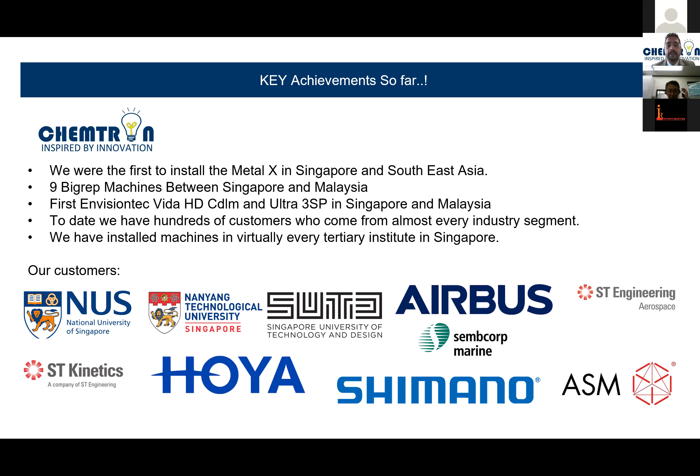system in Malaysia. We have hundreds of customers from different industry segments all across Singapore, Malaysia, Indonesia, Bangladesh, Cambodia. And we've installed these machines in virtually every single education and tertiary institute. So below are some of my famous customers that I work very closely with who have my systems and are using them currently for their production and organization use.

So a little bit about me. When I started out this business, I had zero clue about 3D printing. I never knew what 3D printing was. I had no idea what it was all about. In fact, my background was an auditor.

I was an accountant. I actually worked for Ernst & Young for 3 years, and I was doing auditing for companies. After my time there, I was looking for something different, and I like to talk, I like to present, and I joined the family business. And that's where I was given the task of expanding this up and coming technology called additive manufacturing in my country. So I started out from zero.

And the reason why I keep mentioning this is because I want to tell customers and potential people over here that it's not a very difficult technology. For me, I have zero manufacturing background. I have no degree in engineering, but yet I still am able to learn and understand this technology easily, which is, if I can do it, you guys can do it for sure.

Now, for us in my company, what I do is I very carefully pick brands that I believe will give a lot of potential, a lot of benefit to my customers. So whatever brands that I'm talking about are brands that I've studied properly and have a very strong impact in the market. It's not any kind of 3D printers. There are thousands of 3D printers in the market today, but the ones that I pick are the ones that I feel will give benefit to the people who have it.

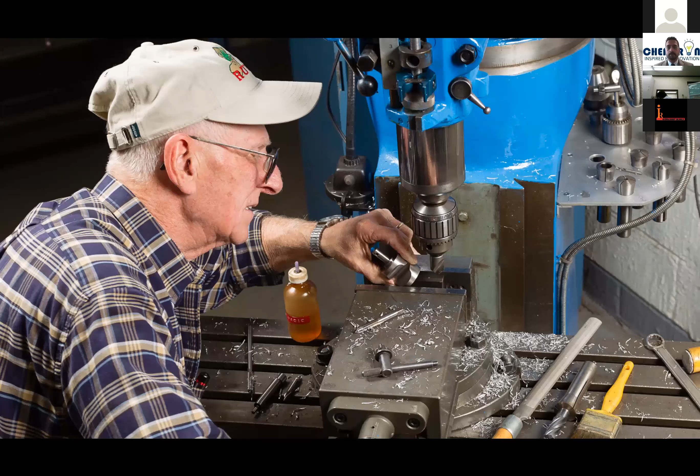So we all see this picture here. This is what we see in all manufacturing companies, the CNC machines, the milling machines, and all of that. This is a very common scenario in all of our manufacturing companies. Not to say that it's bad or anything, but it's just been there for a very, very long time. And this is what we are trying to move forward with.

I'm not going to say that it replaces this technology. I'm going to say it's going to complement manufacturing. Additive manufacturing will never replace the traditional methods, but it is a step forward for new technologies and to leverage on both technologies to get the best for your customers.

So with that, you will need toolings to get everything on board. You need to fabricate the fixtures, you need the mold making, you need CAM. All of these toolings are needed, and this takes a lot of time, a lot of process. And then it goes into production, and that's when we talk about large-scale productions. You'll need the logistics, supply chains, and finally, you'll get your product in your hand. So the whole process involves raw materials, manufacturing, shipping, as well as inventory.

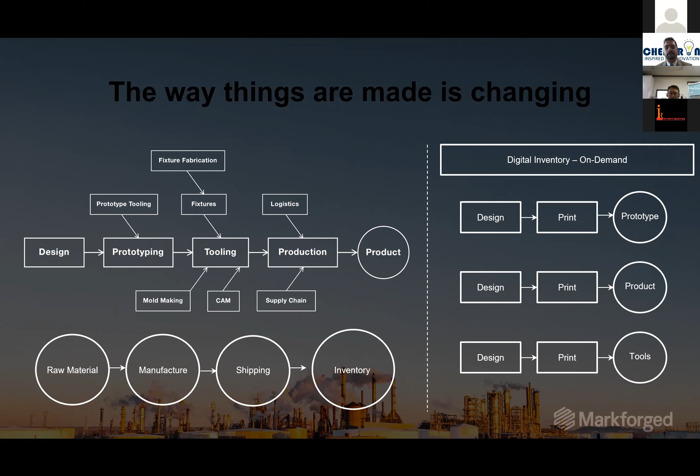So recently, and we all know, and we are currently facing this, the coronavirus. Just overnight, we were not allowed to leave our homes. We all had to work from home. A lot of the manufacturing companies could not access their production plants. And what happened was that it affected supply chains, right? So people couldn't get the parts, couldn't get the equipment they needed, and there was a break in the supply chain.

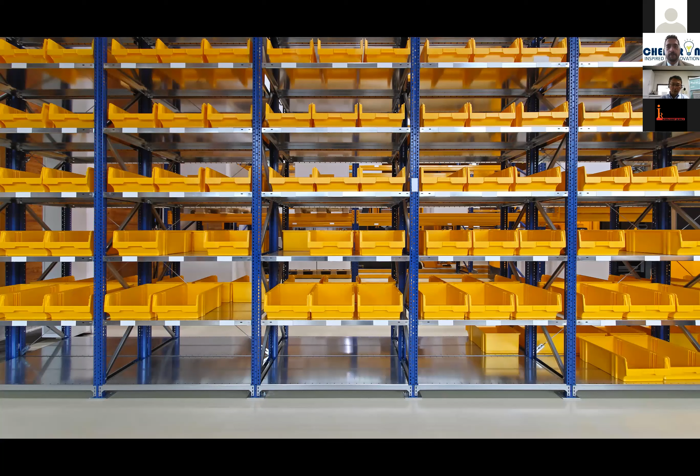Now, this is one scenario. There could be many scenarios in the future. And if something else happens again, are we ready for this? What are we going to do, right? So some scenarios, for example, we have no parts, right? Because the whole supply chain has broken down, there are no more parts to be produced. There's no way we can get the parts. What do we do, right?

And this is a scenario that could crumble a lot of companies who are reliant on these supply chains, right? And if they can't have the supply, they can't produce, everyone's on idle. So this is a very serious scenario that can happen. And it's already happened recently in the last 2-3 months.

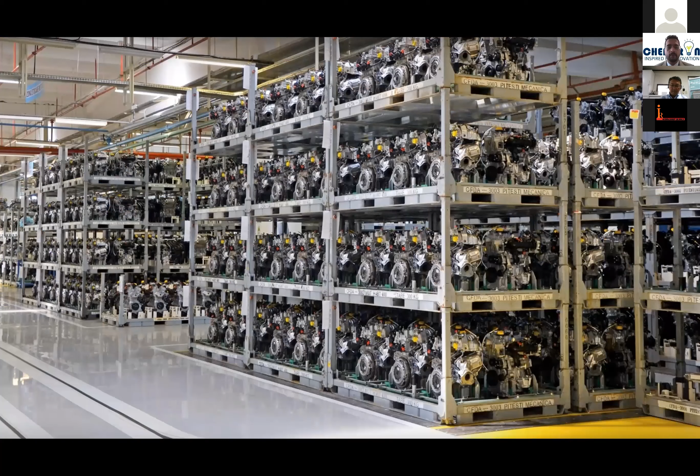The other scenario is you keep so much inventory, you keep so much stock. And what if that whole production line or that machinery is obsolete and no one uses it because technology is moving at such a fast speed, right? If you keep so much stock of inventory, it's money basically lying there and it's stuck and you cannot move this inventory, it's money tied there, you're going to lose a lot of cash flow, right?

So this is another scenario that we don't want to end up with, where we want it to be just in time, like the Japanese, where you get it and then straight away you can use it. But most of the time we end up with these kinds of scenarios where it's overstock or oversupply, right? And we don't want that as well.

So just giving you a little bit of a history tour. What revolution are we in right now? So we had the first revolution, which was water and steam, and that was in the 1700s, right? And then we progressed really fast. We went into the second revolution where electricity and mass production was working. That's in the 1800s. The third revolution is the electronics and automation. So a lot of things were automated, factory lines were produced. So we continued making a lot of mass production products. But this is still the third revolution, right?

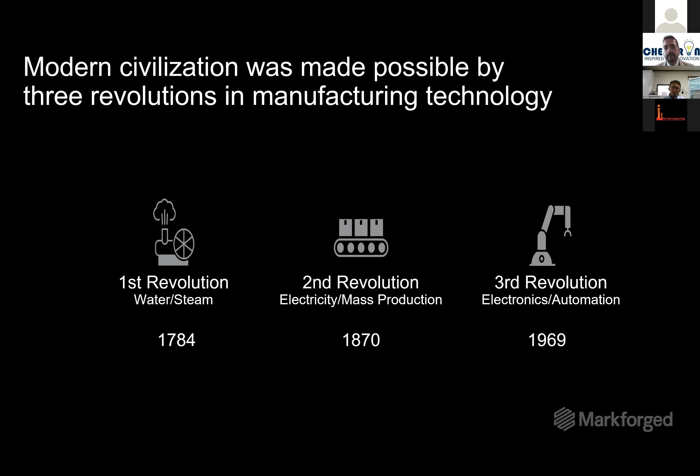We have now entered the fourth revolution, right? And that is changing everything. And it's called digital manufacturing. This is going to change a lot of industries, a lot of sectors, how we run our business, how we do things. And it's affecting every single industry across the board. For example, aviation, aerospace, automotive, defense, energy, medical, consumer goods, anything and everything that you can think of. The industrial revolution is here, and that's the fourth industrial revolution. Smart manufacturing, right? That's the keyword.

So how do we adopt, and how are we preparing ourselves for this fourth revolution, which is already here, so that we are always ahead of the game? Because if we don't keep up with the way technology is moving, we will be left behind very quickly.

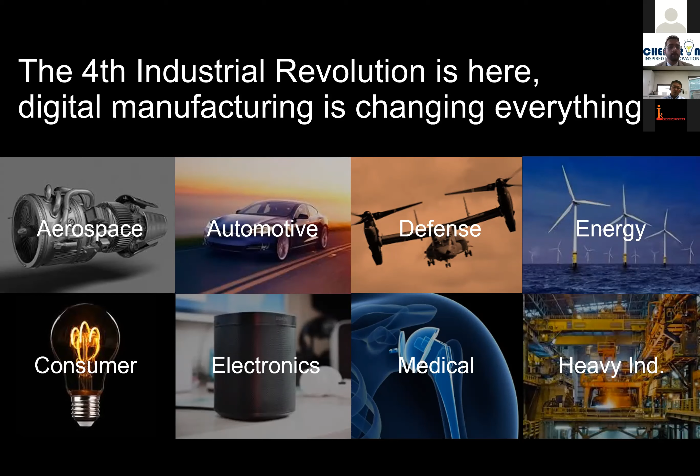So this industry is really growing quickly, and it's going to be adopted very fast across our organizations. A lot of the schools, that's the first factor. If you see schools investing a lot of their money in this technology, you can understand that they are preparing the younger generation to take up this technology, and they take the skill sets to our existing companies and implement this technology in their organizations. So additive manufacturing is definitely going to grow exponentially in the next few years. And this is something that we need to be ready for, right?

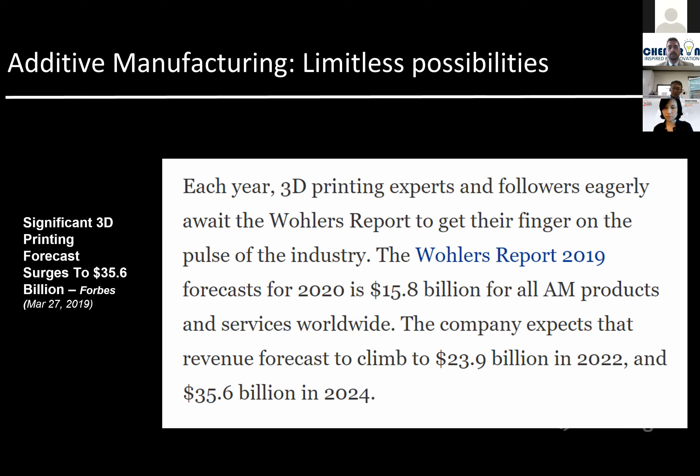So what is additive manufacturing and 3D printing? What is it all about? Now, to sum it up in a very simple nutshell, right?

Now, additive manufacturing, which in its word is adding, right, is you take the material, you put it into a 3D printer, for example, and it's adding material to the part that you want to print. So only the part that is needed to be printed is the part that comes out of it. So there is very little wastage. So that's how we differentiate additive manufacturing from subtractive. And this is the essence of 3D printing, adding materials to what you want printed.

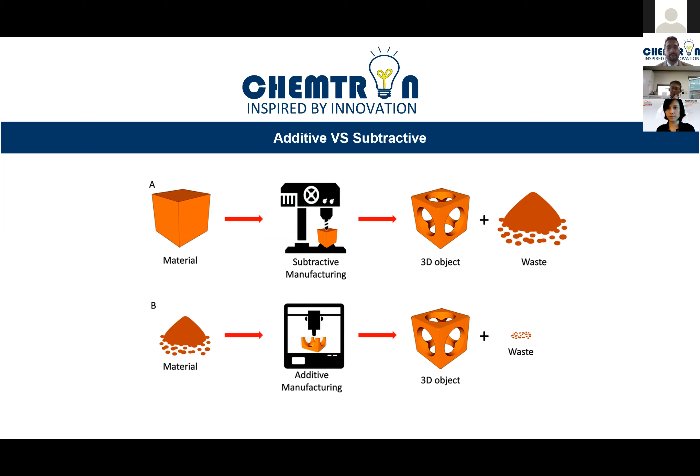So how do we begin, right? So the first option, and this is a common option, is you have to do CAD modeling, right? So CAD modeling is basically all the softwares that are available. Some of you must have been already trained with these famous softwares. Some of them are free and you can go and check them out online. It's basically creating a digital file, right? So you have a model or you have a 2D diagram, and from there, you create the file and you make your 3D object out of that.

And the file that we are talking about today is called an STL file, right? It's something like a Photoshop file, like a PSD file, or a PowerPoint file where you have PPT. Just imagine 3D printing is an STL file. That's the one that we want. So we get this file. That's one option, right? So now you have a digital file ready.

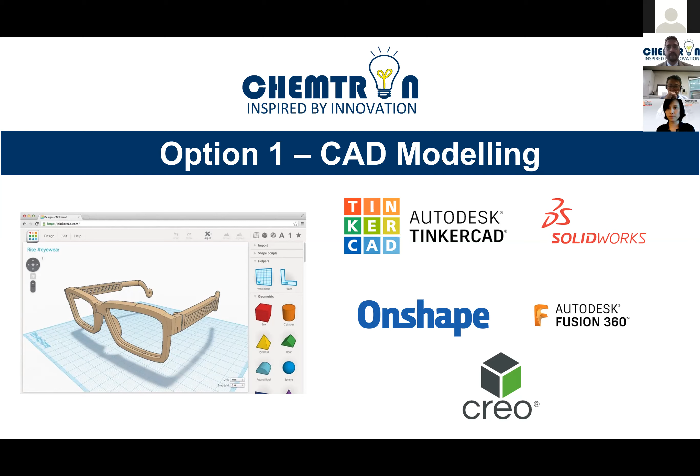The other option, a lot of my customers come to me and say, look, I don't have anyone who can do this. I don't have anyone who can model for me. What do I do, right? So the second option is 3D scanning. So 3D scanning is basically taking a scanner, and that scanner actually takes thousands of images of the object and it scans it to get your part, right? So I'm going to play you a video to show you what I mean. Take a look.

So this is the scanning portion of it, right? So this is where you get a handheld scanner and you scan whatever object. And this is really interesting because sometimes we don't have the drawings anymore. They're really old parts and you want to do refabrication of this. This is where 3D scanning will come in. So the first option is you design your file and you get the digital file, or the second one is where you scan it and then you get your 3D file.

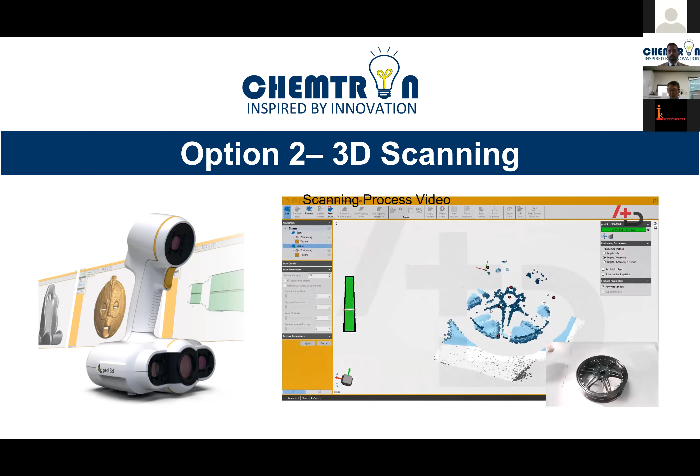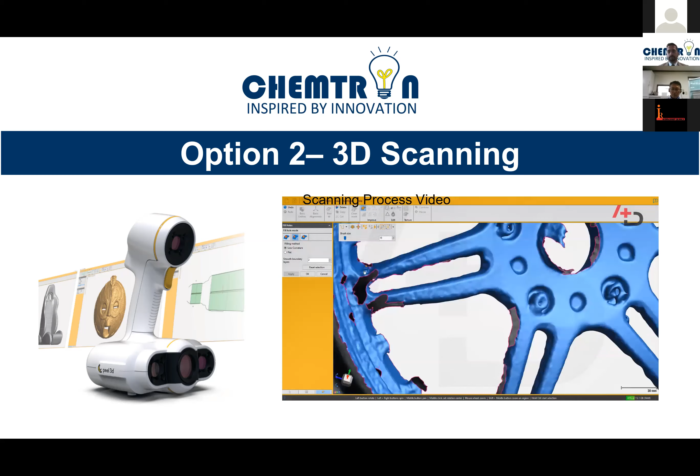So that's an example of how we scan a tire for somebody who wanted the digital file of that. So moving along, now we are at the stage where we already have our digital file, right? So that's the first step done. Now we want to recreate that file into the 3D printed object, right? So we need a 3D printer, for example, to do this. But in the market, right, there are so many 3D printing technologies as well as brands out there that provide different technologies for different applications, so to speak.

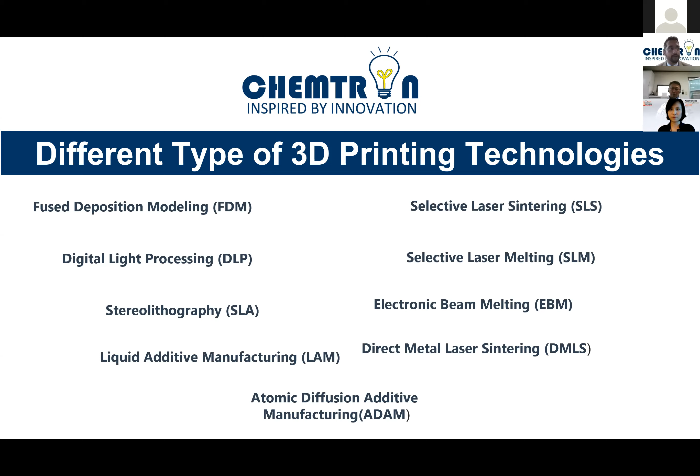So fused deposition modeling, right? That's the first one, FDM. So FDM is, how I like to explain this to my customers is, imagine you take a hot glue gun, you put a glue stick inside, and wherever the part is heated, that's where the glue comes out. So you are layering one layer by one layer where you want the glue to be. Same concept here, but instead of glue, we're putting in plastics. So the plastic goes into the machine and then it prints out layer by layer the object, and you get your 3D printed part, right?

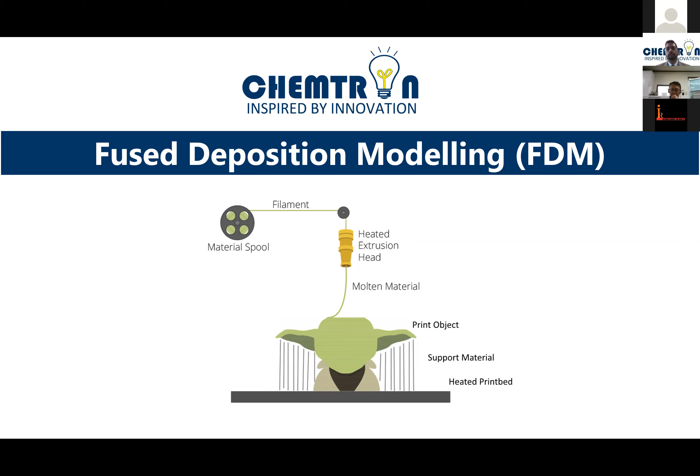So this is FDM printing, fused deposition modeling. So something like this is how it prints. Layer by layer, it goes up. So what are the benefits of this technology? Number one, it's good for prototypes. It's good for models, right? It's easy to use. So even if you're someone who's just starting 3D printing today, you can plug in and you can start to print, no problem. Very simple and easy to use, I think.

The disadvantages for this kind of technology, the surface quality is not great. So if you're in the jewelry business or the dental business, this is something I will not recommend you to use, right? Also, another very common problem with this technology is warping and very bad accuracy sometimes. Warping is when, imagine you have a hot object touching a cold object. It starts to shrink and warp, right? So this is a common problem that we have with this 3D printing, because the head is normally about 200 degrees and the bed is about 90 degrees. So there is some sort of warping that comes into play, which causes not a fully proper print, right?

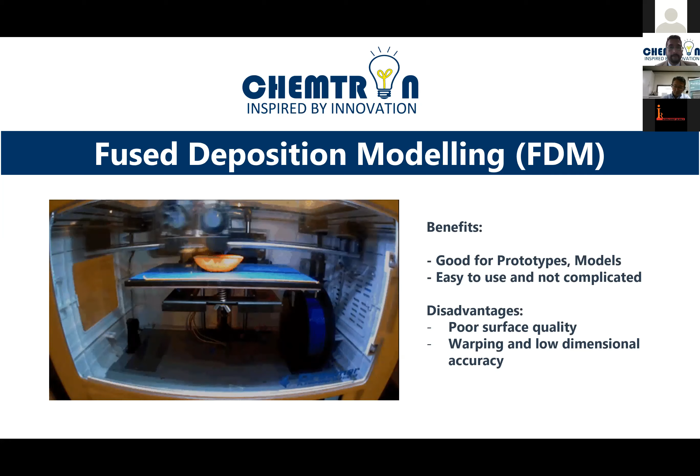So what I'm going to share with you now is one of the FDM machines, which I believe is one of the best out there, because I have tried a lot of FDM 3D printers, and the one that I really like and the one that I represent also because I believe in this product is the Markforged printers, right? So these printers are using the FDM technology. And the thing about these guys is that they are the world's first company to actually print carbon fiber, Kevlar, fiberglass, right? They are using these materials in the 3D printing object.

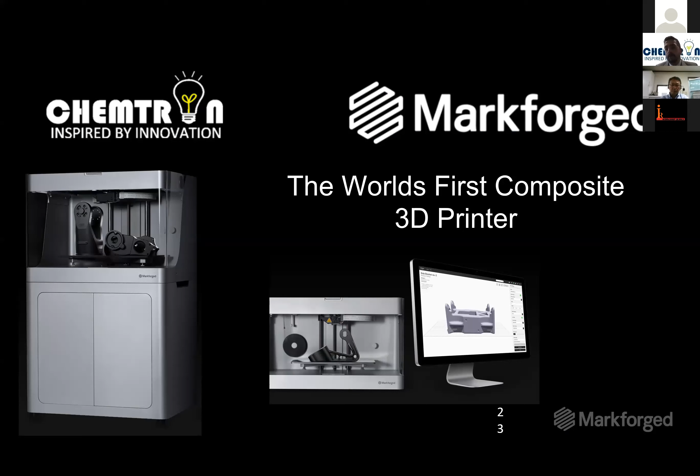So what does this mean? Remember when I was telling you that 3D printing is just for prototypes and models? With this system, you don't have to print prototypes anymore. You're actually printing end-use parts, right? You're using carbon fiber, Kevlar, fiberglass to make it so strong that it can be as strong as aluminum. And when you print it, you can actually use it for a functional part. And this is where it's being used in your jigs, your fixtures, your toolings, anything in your production line where you need to make something. Instead of fabricating with a CNC, you can now 3D print all of this overnight. And that's how it works.

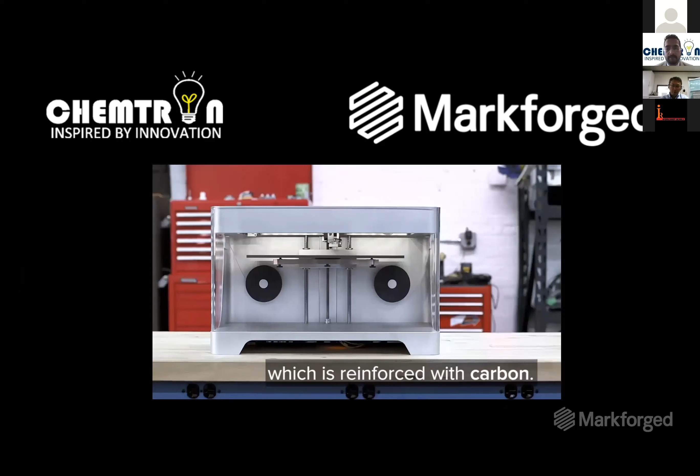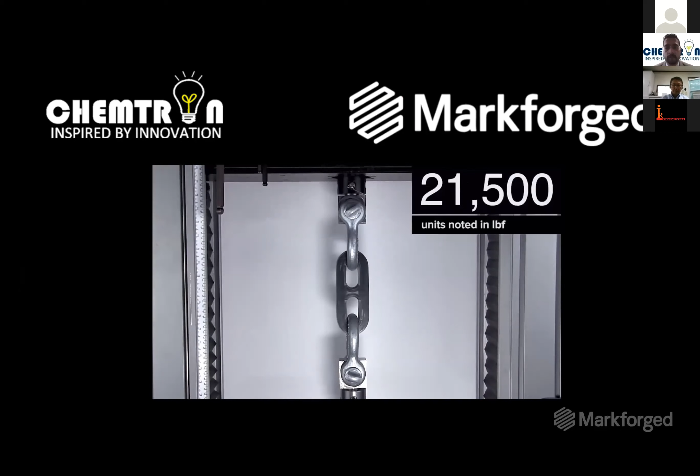So let me show you a short video. There is no sound in this, so it's okay. So this is where it's printing with the plastics and it's reinforced with carbon fiber, for example, or Kevlar. So this part that was 3D printed on the desktop, it's actually holding about 21 to 22,000 pounds, right? And that's about 10,000, 11,000 kgs, equivalent of lifting a car, a boat, a cement truck. So with this force, it finally broke at 11,000 kgs, about 11 tons. And that's the difference between the normal FDM machines that we see and these guys. So these guys are leveraging on the composites point of view.

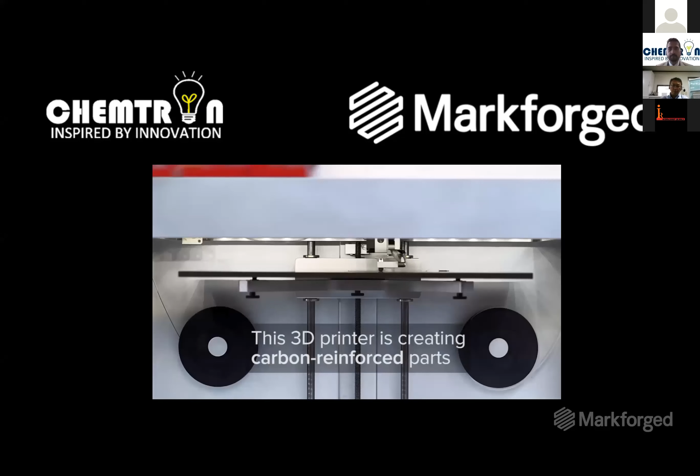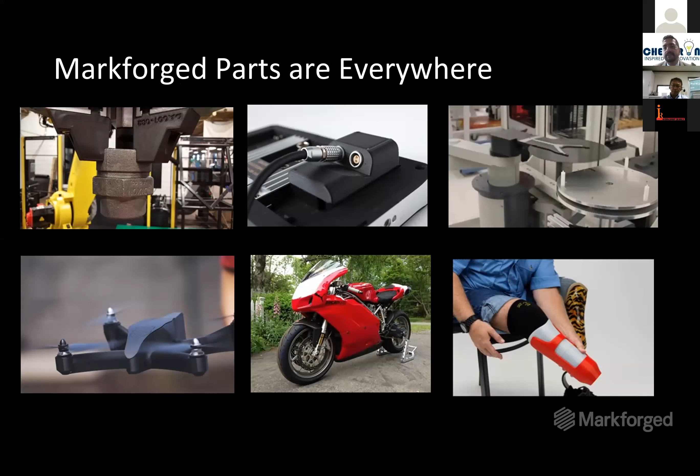So some of the applications of Markforged 3D printed parts, basically everything and anywhere, right? Because if you can 3D print something so strong, you can use it for your production toolings and fixtures, your end-use parts, your functional prototyping, drones, automotive and performance parts, as well as your prosthetics and orthotics. We actually have customers in all of these industries, and they're all from Singapore also. And it's amazing how they are using this technology for their day-to-day production use.

One example is that one of the hospitals needed to print a prosthetic, and we actually printed the whole cast for the leg. Drones and aerospace: we have a lot of drone companies who are using our materials and leveraging on Kevlar, for example, because it's good absorption of impact for their drones, right? So this is where 3D printing can come in and make an immediate impact, where you print it overnight and straight away use it the next day. Yeah.

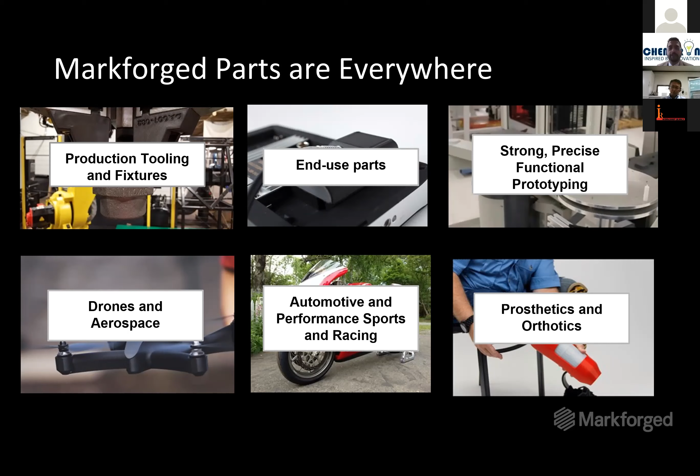Now, what you saw earlier on was the FDM process, but one thing that a lot of people feel is that the parts that we 3D print nowadays, if you look around, are actually very small, right? We can only print maybe up to 30 cm by 30 cm, and that's all we can go. But why must it stop there? That's why I chose, and I studied, and I looked around, and I found out about BigRep, right?

So BigRep is a 1 meter by 1 meter 3D printer, right? So now you no longer print scale parts, you can print huge parts, 1:1 scale for your use. And there are so many applications for this, especially in the signage industries, the props factories, the propeller industries, sand casting, molding, which I'll explain to you shortly. So take a look at this.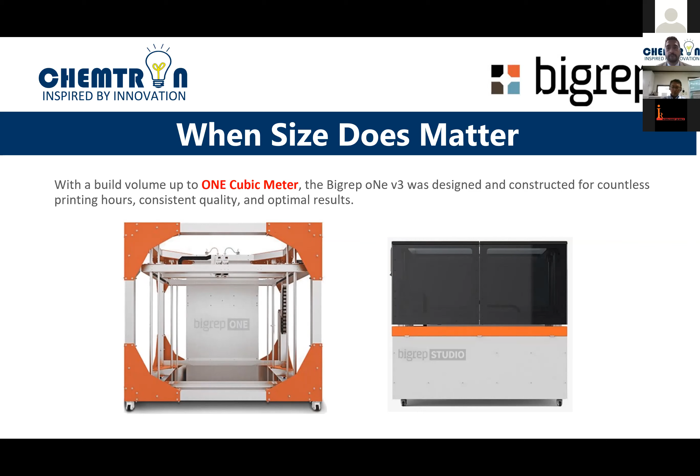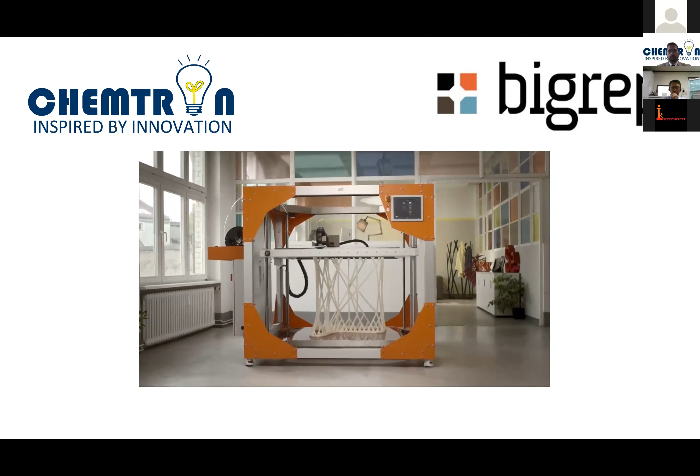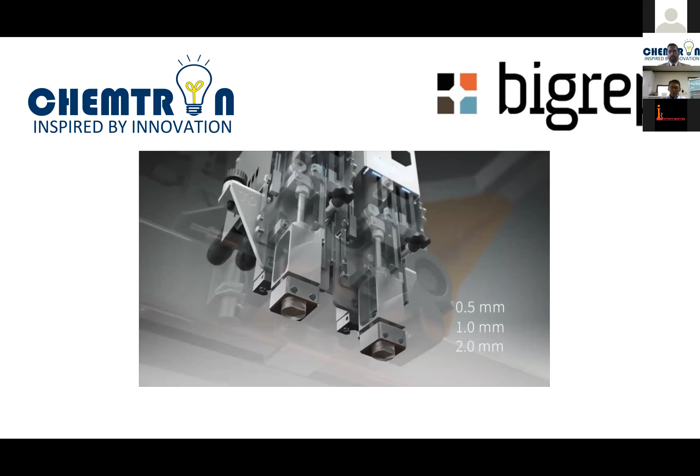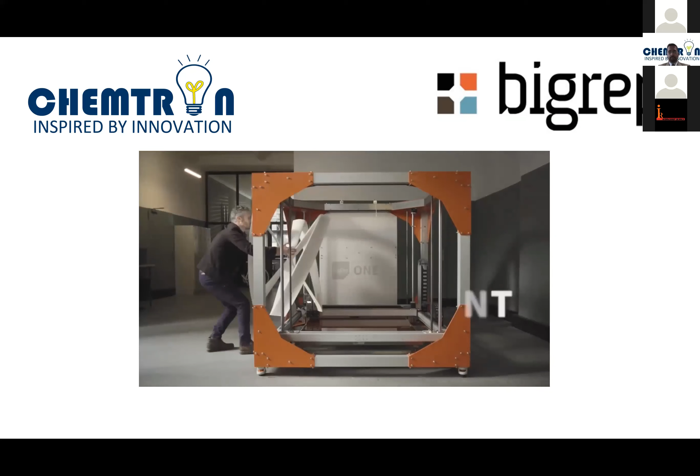Every big idea starts with a question, a problem that needs to be solved, a passion to invent something new. We believe that through innovation and creativity, big ideas come to life. Introducing the BigRep ONE, a revolution in large-scale 3D printing. The ONE's award-winning design is rooted in uncompromising German engineering. Built with a capacity of over 1 cubic meter, the BigRep ONE has the largest FDM build volume on the market. With the BigRep ONE, there's no need to scale down your original designs. Print objects quickly, reliably, and consistently. The open build design ensures that the user has the best possible view for monitoring quality from all angles. The 2 modular print heads allow for top flexibility when printing in 2 colors or with support materials. Their independent movement ensures a clean print result while changing between filaments. The print heads can be equipped with either 0.5, 1, or 2 millimeter nozzles. The 2 millimeter nozzle slashes build time. Whether you're producing a series of objects or designing a single product, large-scale prints now build faster. An integrated control unit and touch panel allow you to monitor print time, change the speed, or even adjust the temperature of the print bed, all while the print is in progress. Ideate, design, print. Here at BigRep, we're making big ideas a reality for everyone. What is your next big idea?

So this is what I mean by printing big, right? So now we can use the big area to print. Obviously, prototyping is one. Carbon fiber layup tools, we can make the mold. A lot of the time, mold making is a long and laborious process that needs a lot of labor involved in cutting it and sanding it and filing it. Now you're printing the mold.

Also for sand casting, for example, like one of my customers that is making propeller blades, they need to sand cast it. They make the propeller blade as a mold, and then after that they sand cast it to proceed in the fabrication process. So this is where the BigRep can come in and help you with this, with large format printing.

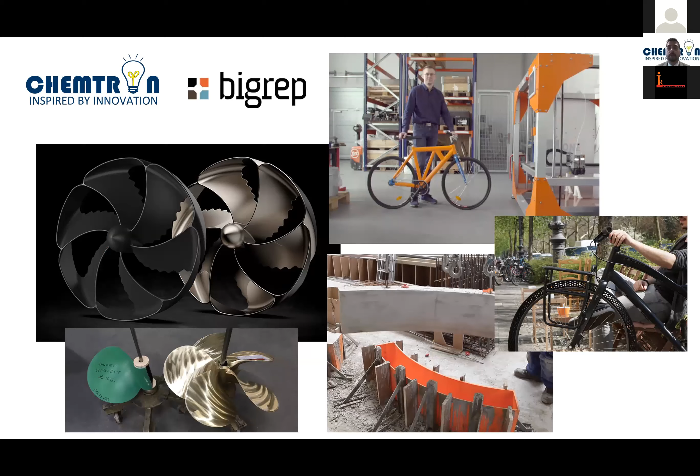So now we are going to move on to another technology called DLP, Direct Light Processing systems. So let me show you this video to show you what DLP printing is about.

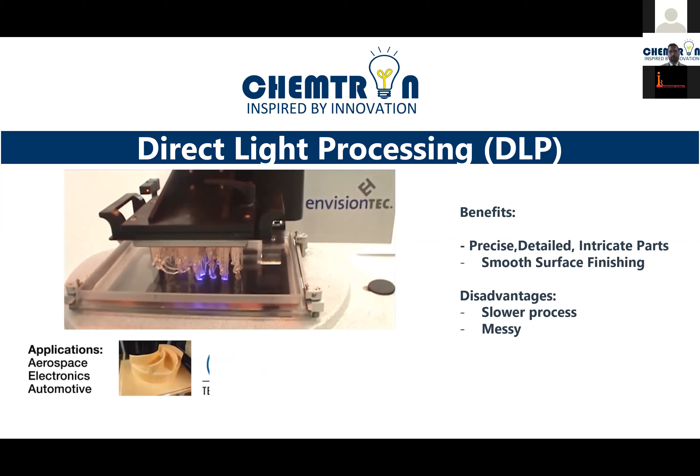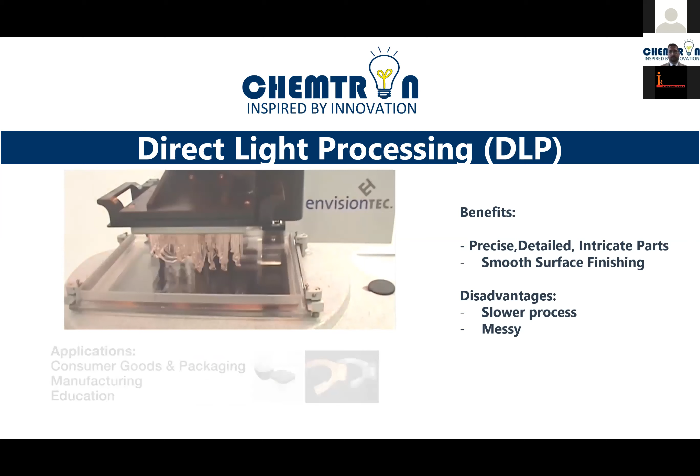So this is another technology that uses liquid, and then there's a light below, and that light shines on the platform. So wherever it needs to be printed, the light will harden that resin, and that's where you get your object, right? So this is how a direct light processing system works. Now, what is the advantage of this?

This is very important. For people who need applications like dental and jewelry, you need very precise prints. This is where you need to use this technology. You cannot use FDM because you won't get that kind of quality from it. And the surface finishing is also very nice. So a lot of jewelry companies, for example, get these machines and use them for casting, investment casting. They get the jewelry mold itself and they cast it with gold or silver and stuff like that.

For the dental side also, where they want to make the aligners, the denture bases, the crowns, the bridges, you can use direct light processing. The only problem is it's a little bit messy. With liquid resins, it gets a bit sticky, and it's also a slower process. But if that's okay with you, this is fantastic for this application.

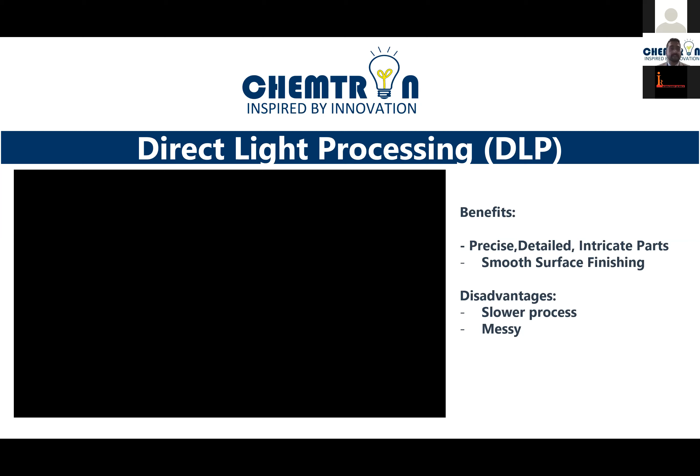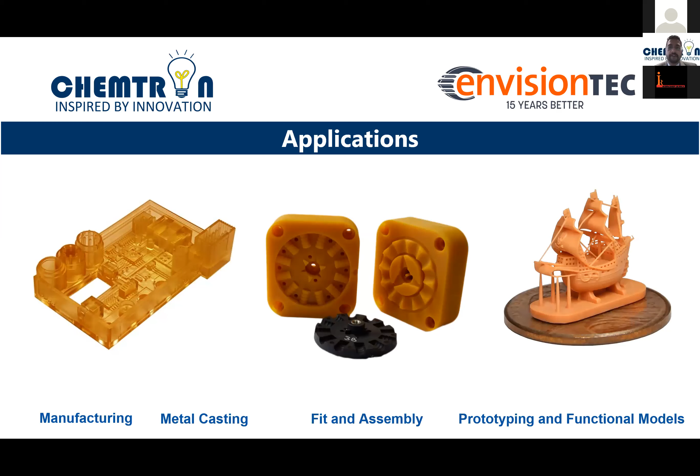So I'm going to give you some examples of what is printed with a DLP process. You can do really fine prints, like a PCB board, for example. You can do a small production run for injection molding. You can also print very detailed models with sharp features, right? So if you're in the toy industry, this is something that you will need to look at.

Dental as well, dental clinics and dental labs are using this technology now to scan the patient's teeth with the scanner, and then they 3D print the dental applications. And most importantly, in the jewelry industry, this has been extremely famous in all of our Southeast Asian countries. They're taking up 3D printing for jewelry. So these are some of the examples that you can do with DLP systems.

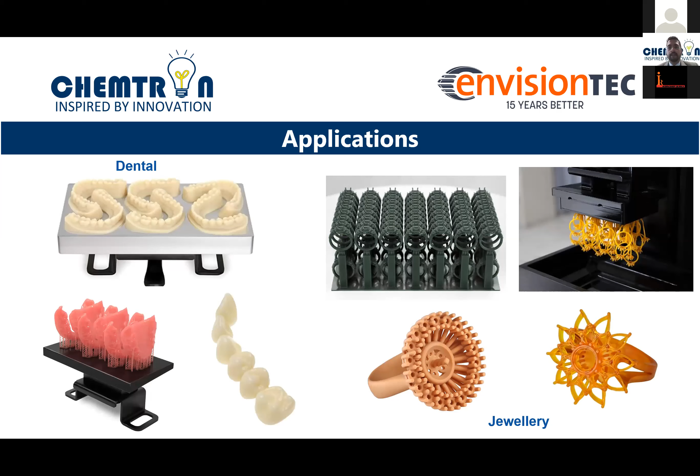And now recently with COVID, they are printing the nasal swabs, where they take the swabs and test your nose to check whether you have COVID. This is something that we are doing also for our customers. We are selling the machines and the whole system with the swabs as well. So 3D printing is very versatile and adaptive to its environment, right? If something happens, we just need to retool our machines, put in another file and print it.

It's very versatile. In fact, just to share with you, my team and I actually brought all our 3D printers home when we were supposed to work from home, and we were 3D printing for our customers. Because we could move the machines to our houses, it was still continued business for us. So this is a great way to adapt and diversify your business with 3D printing.

Now I want to go into metal. Metal 3D printing is also a very attractive technology. A lot of the time, complex metal parts cannot be CNC'd because they need multiple-axis machines. But with 3D printing, you can print very sophisticated metal parts without having them machined. So things that couldn't have been done before, you can do now.

The metal process I'm going to talk about is from Markforged, called the ADAM process, where you first design your part, you 3D print it like you did with the FDM machines earlier, and then it goes into a wash where the solvent eats into the metal filaments, and then it goes into a furnace to be heated, where it fuses together and you get your metal part.

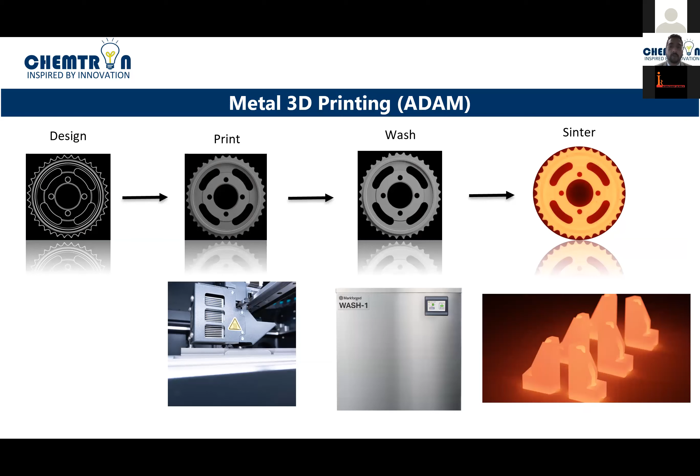So you can actually 3D print metal, and with that, you can produce metal end-use parts. So some of them are using it for end-use parts, robotic grippers, and also metal prototypes. Our lead time for metal parts is, for example, 3 to 4 days. I get the digital file, I print it. After that, it goes into the wash and then the furnace, and you get your metal part in 3 to 4 days. So it's an extremely fast system to explore, right?

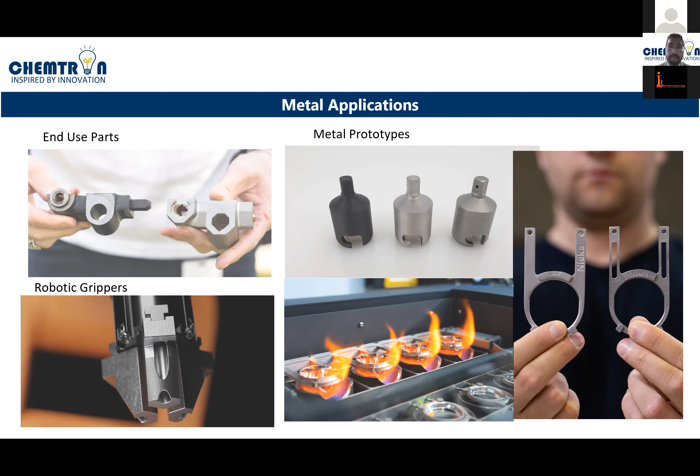So this is all about metal printing. Currently, we can do 17-4 stainless steel, Inconel 625, copper. We can also do H13 tool steel, A2 tool steel, and D2 tool steel. So these are all the different materials that we can print currently right now.

Lastly, this is a little bit interesting, right? So this is bioprinting. Bioprinting is something a lot of researchers look into when they want to print out cells, human cells, skin cells, also stem cells, right? These systems also require 3D printing. And to do this traditionally in the labs is very difficult, because you need to use the Petri dish, you need to lay it out, you need to understand the cell behaviors.

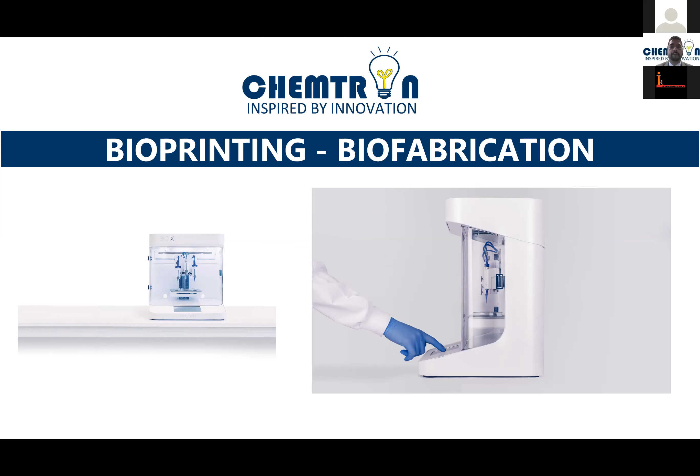So bioprinting is the future of medicine. So imagine in the next 5-10 years, if somebody has a kidney failure or a liver failure, they can actually 3D print your organs, right? It's still in a very, very early stage, but this is where the technology is going. And the best thing about it is all the material comes from your own body, your own cells. So for example, my body will not reject my own cells, right? So this is something that they're doing a lot of research on.

So currently, like in this mouse over here, they have actually 3D printed the cartilage of an ear, and they placed that cartilage onto the mouse, and it started to grow on its own. So these are some of the examples of what they're doing. 3D printing human soft tissues, stem cells.

They are also 3D printing tumors to find cures for cancer, because tumors spread very fast. So what they've done is they printed the tumor in the machine itself, and they're testing it with different cancer treatments, and whichever cancer treatment works for the tumor, that's where it will not spread. So this is how they are working on ways to use 3D printing in the research of cancer treatment to make it faster and easier for the patients.

There's a lot of talk of us colonizing Mars in the future, other planet occupation, for example. And in order for us to do this, we need to have systems like this in place so that we are continuously able to regenerate ourselves, so to speak. And this is being done with bioprinting. So this is also another form of additive manufacturing.

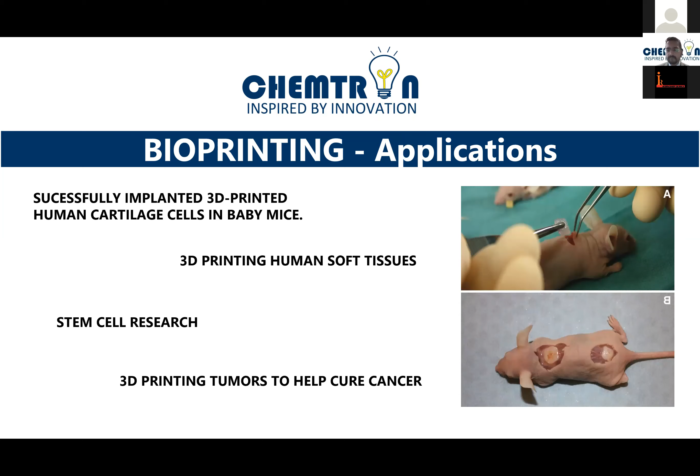And the best thing about it is all of this uses a cloud system. So for example, right now, I'm in my house. I can actually press print right now, and the machines will start printing in my office. And I don't even have to be there, right? So all of these systems are taken care of by not many workers. Maybe one or two workers can run this whole facility easily. And this is where we are going, manufacturing at large scale at an extremely fast pace without holding much inventory and resources, right?

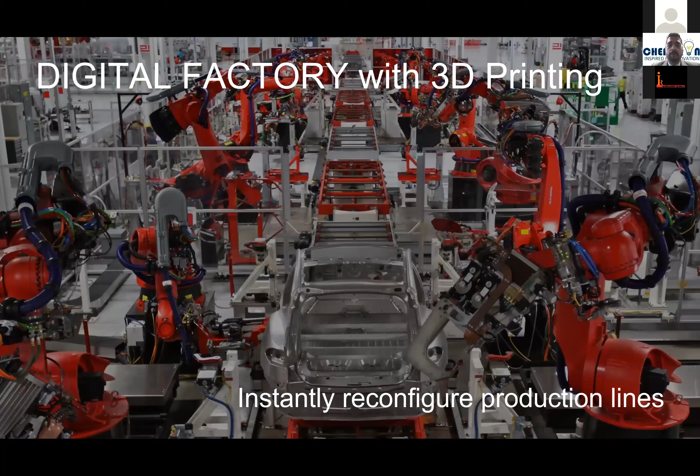We're also going to look at the production floor, where it's going to be fully automated, robotics-wise. And with all of this robotics, you will need 3D printing to print the jigs, the fixtures, the tooling, and all of this. And this is where we're going to make extremely fast production of any part, right? So there'll be less use of humans in that sense, but more automation and industrial IoT, Internet of Things, to get parts produced much quicker and faster.

So this is where the industry is heading towards, and we should be on board with this, adopt these technologies as fast as we can, so that we are always ahead of the competition. With that, I think I've come to the end of my talk. So I hope that you have understood a little bit more about 3D printing, what it's all about, the different technologies that are there, the different applications that you can use these machines for.